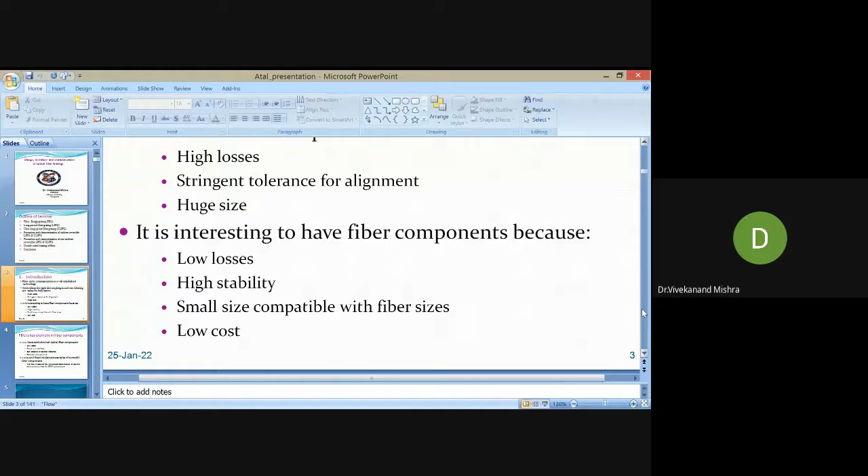It's very difficult to control the light pulses. If you want to do routing, if you want to change the path of a particular signal, how do you do that? So many bulk components are there, bulk optics, but there are higher losses. We need a device with minimum loss, small in size, low in cost, which can let us play with the optical signal, making it much easier in the optical communication system.

One device which is very useful is known as the fiber Bragg grating, a component which has the ability to control the light, to route the light signal, to reflect, to refract, to do spectral shaping of the propagating light signal, and can also work as a sensor. So many things we can do with just one tiny, inexpensive component, known as the fiber Bragg grating.

Fiber Bragg grating is one of the components that brought a revolution in optical fiber communication due to the lower loss in the fiber. It's easier to be compatible with the fiber, with easy shaping of the spectral response. For all these reasons, the fiber Bragg grating is very useful nowadays in optical communication systems for controlling the light directly.

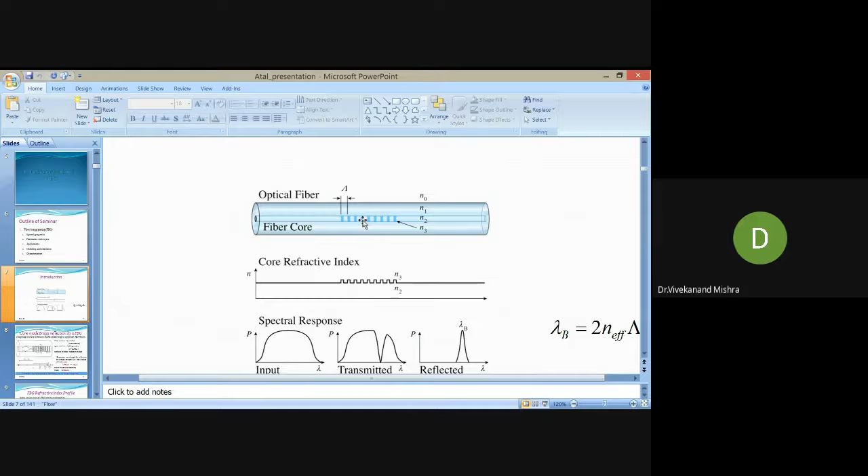But here, light which is coming in the core encounters a change of refractive index again, so the light is going to be interrupted. Depending on which way you want to interrupt the light—whether you want to transmit it or reflect it—we can design this grating period. The grating period plays an important role; based on how strong this grating period is, it determines how the property of light is going to change.

In this case, there's a core refractive index. You can see the variation of the core refractive index: N2 is the refractive index of the core, and N3 is the refractive index of the variation written as a grating.

When the input spectral response is inserted inside the optical fiber, a fraction of light is reflected. You can see here, a fraction of light which has been reflected, lambda b — this is known as the Bragg reflectance, lambda b. This lambda b equals 2 n effective period, meaning the reflected light from the grating totally depends upon the refractive index difference between the core and the period, and the length of the period.

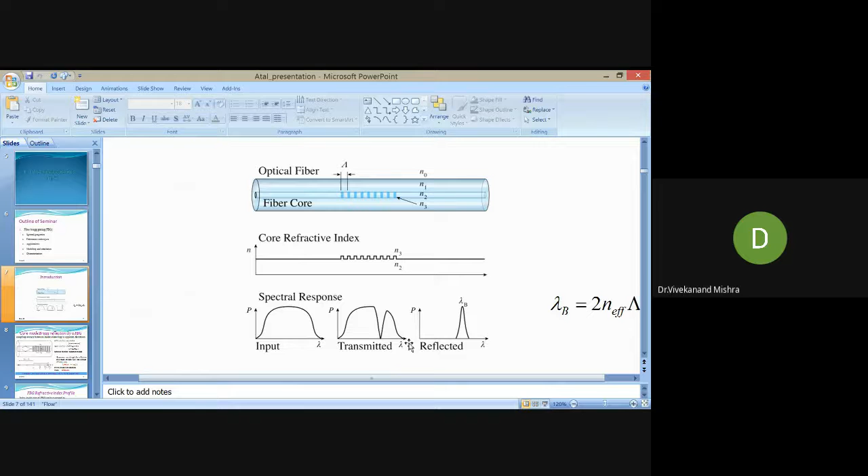And n effective is responsible for the reflection of this fraction of light, which is known as lambda b, or we can say Bragg reflection. So this is one of the very good applications of the fiber grating. Specific wavelength we can reflect according to the requirement. We can design the grating according to our requirement, and we can reflect the light signal. So this is one of the fundamental fiber grating working principles.

In the fiber grating, the main modes which are going to be coupled are the fundamental modes, the modes which only propagate in the core region. You can see here, the light signal is coming and gets reflected, and after reflection they are coupling to each other, and this coupling will let you know what is the spectral response of the light. So here the same modes are there, only the modes which are propagating in the core region.

So that's why here the n effective is going to be combined together, and we can say the Bragg reflection is equal to n effective 1 plus n effective 2 into period. Bragg reflection comes to n effective period, because both modes here are identical. So Bragg reflection will be 2n effective multiplied by the period between the two gratings. This is the period between two, and this is the first order; it is not going to be the second order mode of diffraction, only first order.

Then it's going to be coupled together, and after coupling, how much strong coupling there is of the modes will let you know the spectral response of the output.

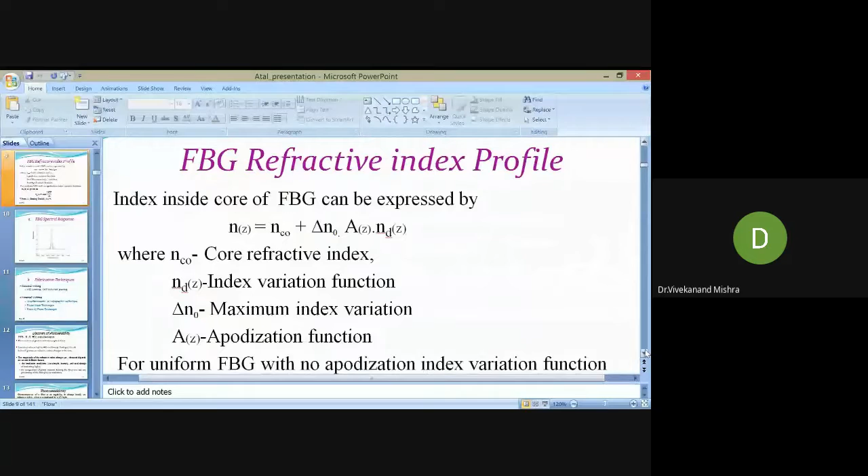Refractive index profile variation inside the fiber grating we can define with this formula, where you can see the core refractive index variation function and the apodization function are the components which will let you know the spectral response of the grating.

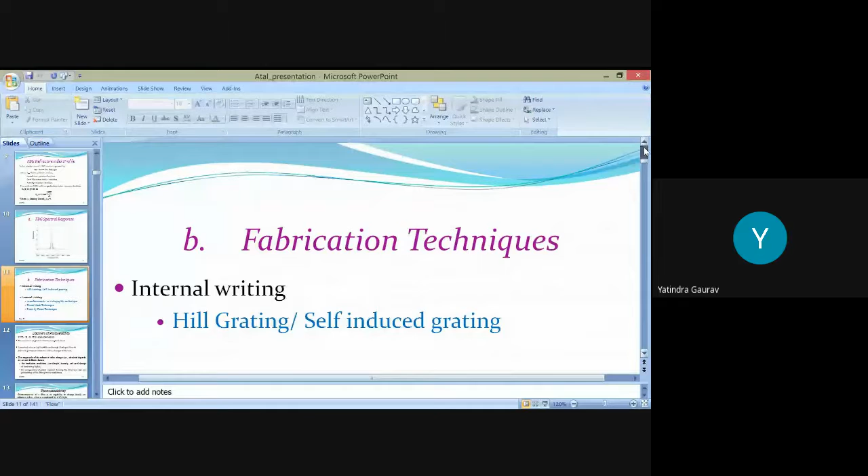Now we'll see how to fabricate that fiber grating. There are several ways to fabricate it. Internally we can write, or externally we can write the grating.

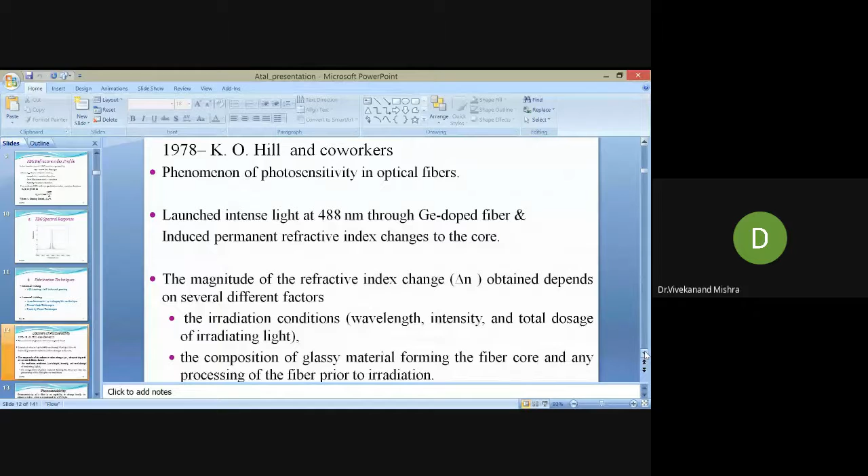So for internal writing, we need to understand the property of photosensitivity, because optical fiber is made from silica atoms, and we dope germanium inside. We can dope germanium inside and make some impurity, some changes, and we can change that refractive index just by doping multiple semiconductor materials inside, and based on that we can modulate the refractive index. So if you want to change or write internally, we need to use the photosensitivity method.

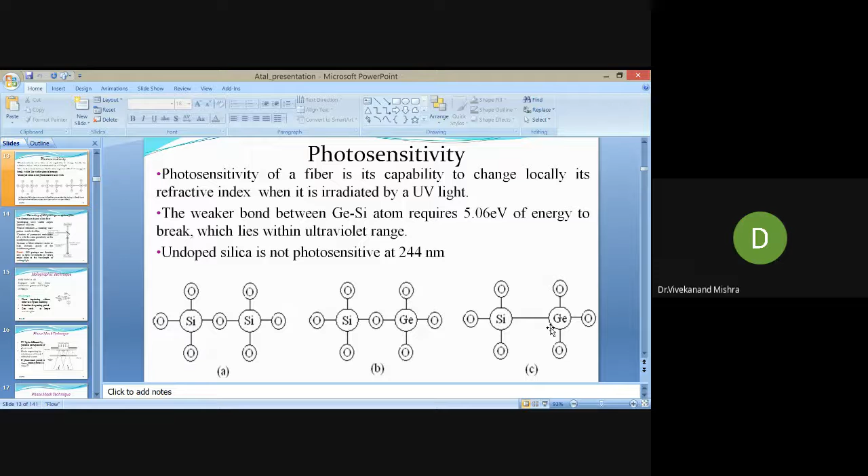You can see here, this is the optical fiber chemical composition. Here silicon dioxide, germanium doped inside as a defect, and that germanium-silica bonding we can break just by applying 5.06 electron volt energy. And you know, breaking of the bonding means changing of the refractive index, and if continuous in the fiber, if you apply 5.06 electron volt energy, there is a continuous change of the refractive index that will take place inside the optical fiber.

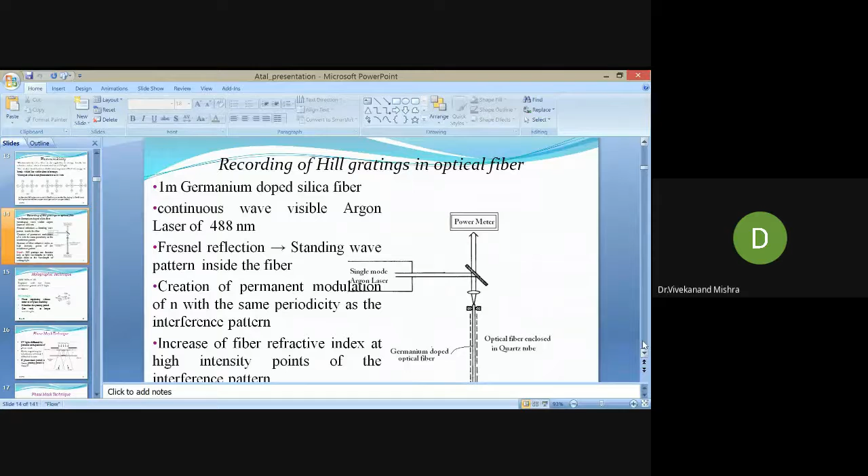You can see here in this figure, this is the Hill grating in optical fiber, how the single mode argon laser is here, and this is the lens. When the light signal is coming inside the optical fiber, a standing wave will form inside, and that standing wave creates permanent modulation of refractive index inside the fiber. And that's why this is the way to get the change of refractive index internally inside the fiber. So this is the internal method.

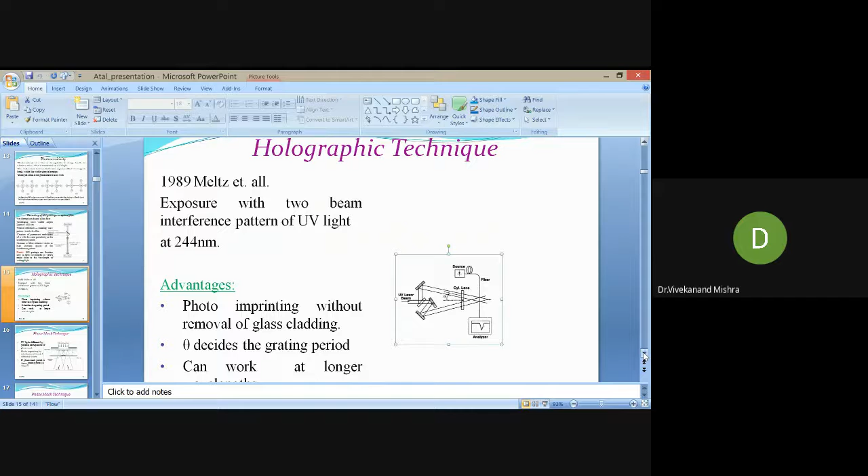So theta will increase or decrease the periods in between the fiber. This is one of the ways to fabricate the grating in the fiber, where we can see in OSA, in optical spectrum analyzers, we can watch at the same time what changes will occur and what the grating length is, and according to that we can increase or decrease the theta value, and make the grating inside the fiber. So this is one of the ways to fabricate the grating inside the fiber.

One technique which is very important is the phase mask technique, where corrugated periods have been used, and when the ultraviolet light signal is incident, interference will take place between the two.

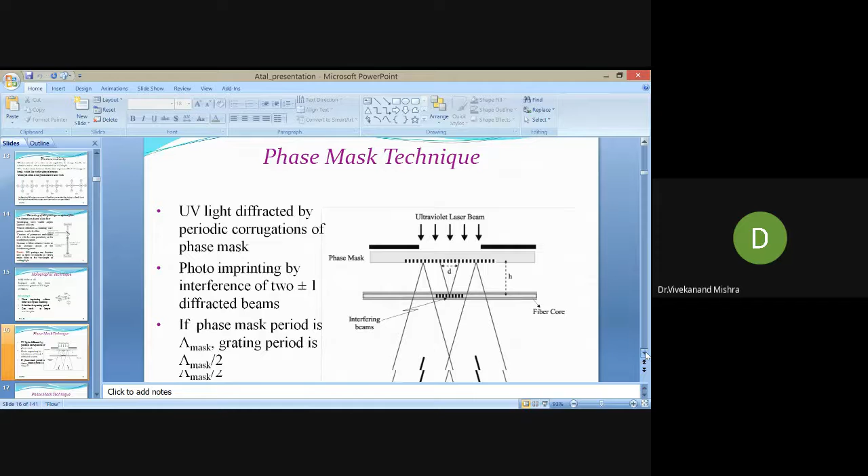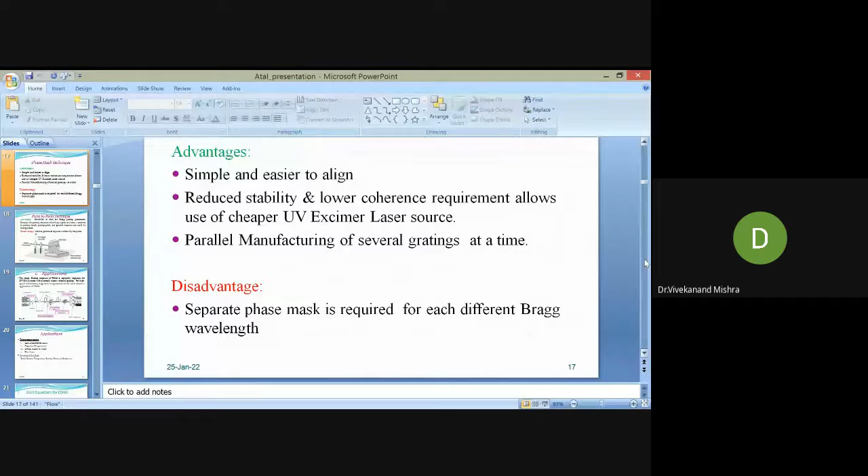You can see the interference technique. By this interference technique, this is the corrugated grating, and the light signal is incident from here, and photo imprinting takes place in the fiber. The plus one and minus one diffraction patterns, first order, will decide the length of the periods that will be written inside the fiber. So this is one method very useful for fabricating the periods inside the fiber. This method is very useful because it's easy to align and it's less costly.

Now we'll see the applications of the fiber Bragg grating. There are many applications, not only in optical communication systems, but in other applications like medical systems, hospitals, and more. Optical fiber grating is very useful. First we'll see the use of fiber Bragg grating in the optical communication system.

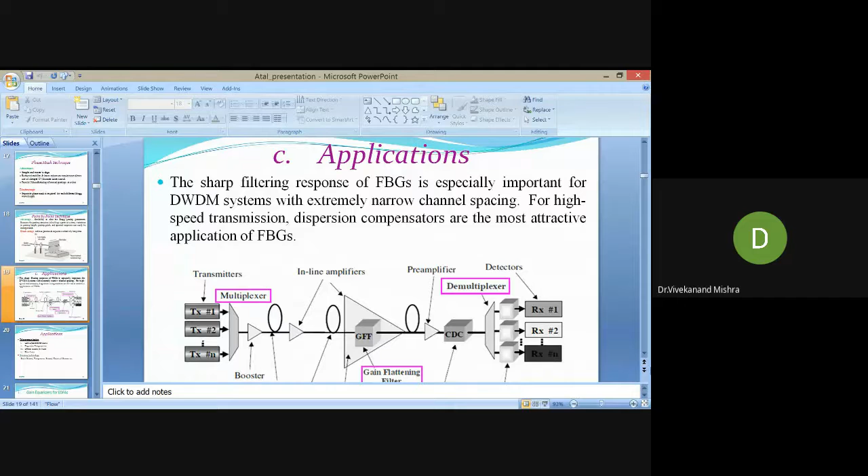You can see this system showing WDM technology. Multiple transmitters are here, and this is the multiplexer. So multiple low bandwidth signals are combined together and accommodated in a single fiber. There is very narrow spacing of the channels, and this is the booster which will amplify the signal. This is the inline fiber, the optical fiber.

So GFF is the gain flattening filter which combines all the gain flattening together, and then that flattened gain can be used for amplification purposes or for signal enhancement, maintaining all the information together. This gain flattening filter is made from fiber Bragg grating. The fiber Bragg grating concept will be much clearer when I explain some other applications of the grating.

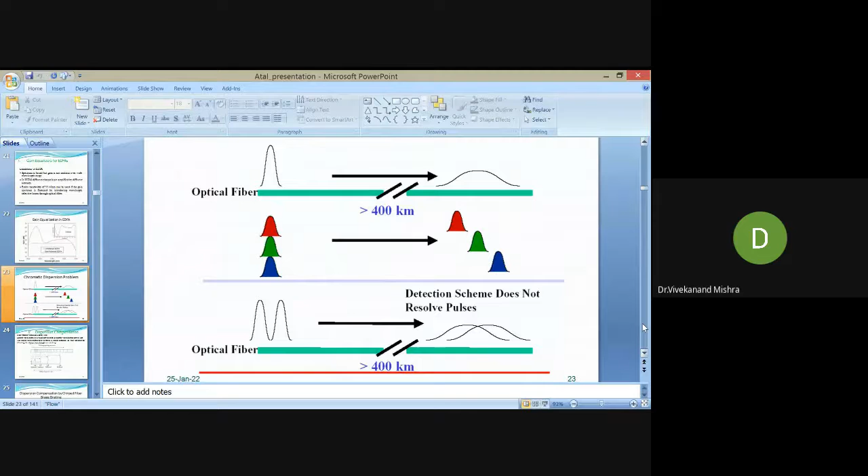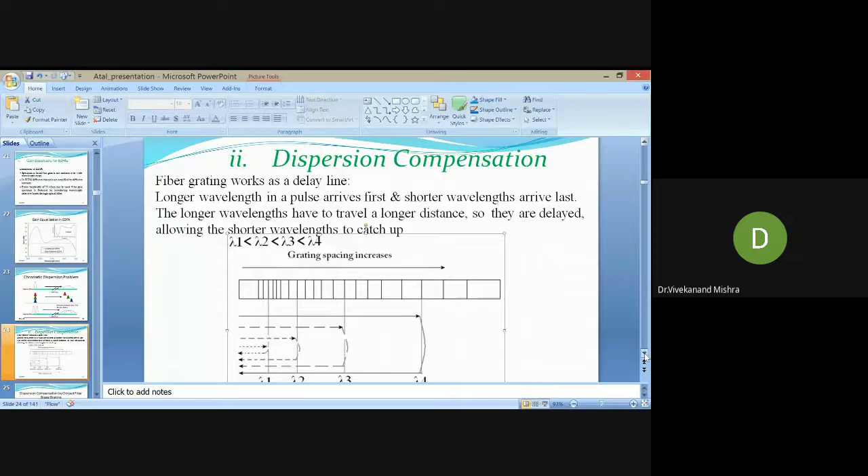Now multiple signals are coming into the grating, and suppose the longer wavelength has to travel a longer distance, and the shorter wavelength will travel a shorter distance. See here, lambda 4 is the longer wavelength and lambda 1 is the smallest wavelength. So the longer wavelength has to travel a longer distance, and the shorter wavelength lambda 1 has to travel a shorter distance.

So what will happen? The longer wavelength will be delayed, allowing it to reach the output with the shorter wavelength. Now the shorter wavelength and longer wavelength will both reach the output at the same time, just by slightly changing the grating spacing. We can design it according to the requirement, which is how to make all the pulses reach the output at the same time. This is the way to send all the wavelengths to the output at the same time.

By making such type of grating, multiple signals can be accommodated, and according to longer and smaller wavelength, they will travel longer and smaller distances. There is a delay for the longer wavelength, and due to that delay, the longer wavelength will also reach the output along with the shorter wavelength. This is the way to minimize pulse delay by using the fiber Bragg grating. Such a fiber is known as chirp fiber Bragg grating, where the grating period increases. If signals come inside such a grating, it will maintain the shape as in the beginning.

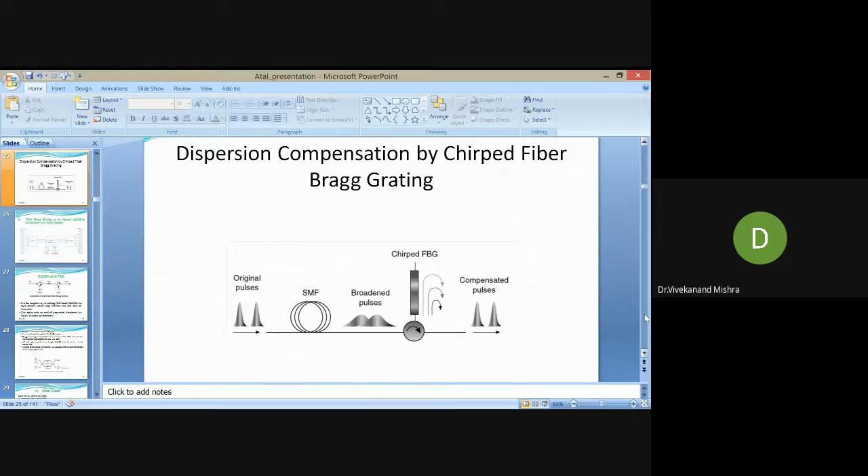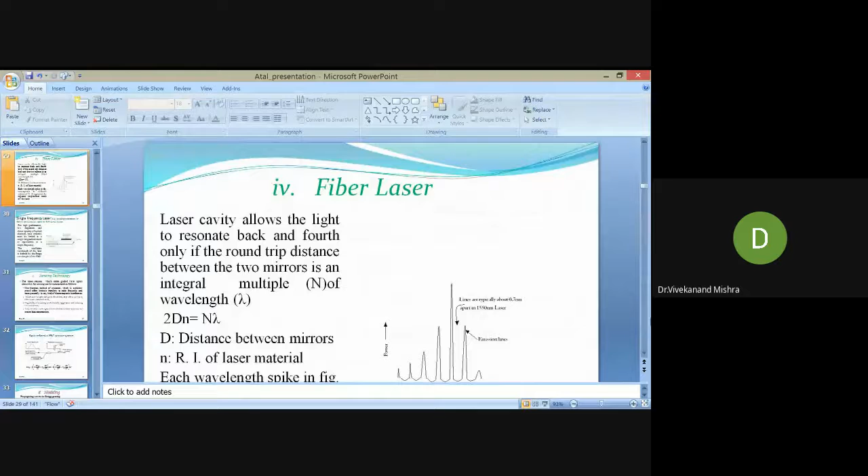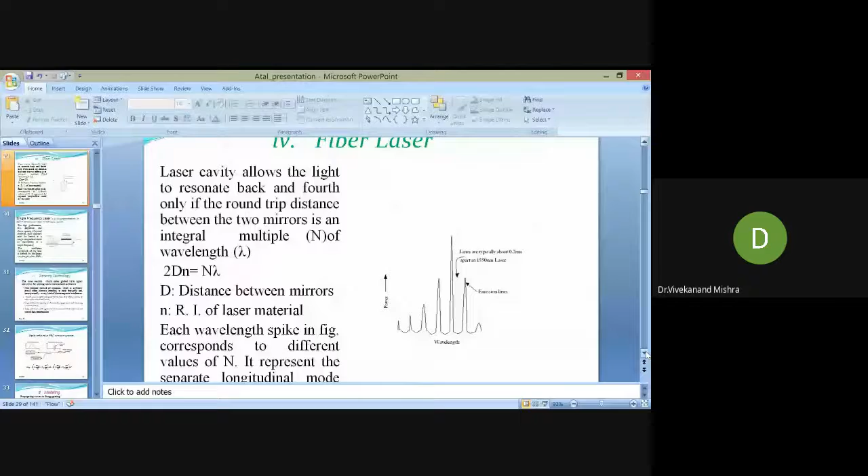We know that in optical fiber communication, optical cavity plays a very important role in the laser. In the laser, optical cavity plays a very important role. In fact, the optical cavity is the one which makes the light signal coherent.

It depends only on the wavelength and the length of the cavity. If the length of the cavity and the wavelength are compatible, then the light signal which enters inside the cavity will maintain coherency. And if it is coherent, then it will be like a laser, because the main principle of a laser is the coherent light source, and that coherency is made by the cavity.

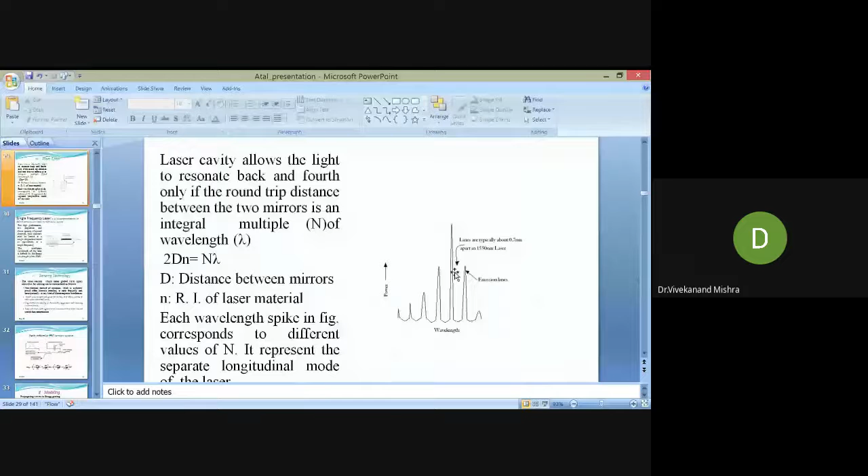Why do we choose 1550? Because it is one of the very useful bands where minimum loss will be there, and also EDFA will support the 1550 nanometer. That's why I choose 1550 nanometer. So if single frequency is there, more bandwidth will be there, and more bandwidth means more message carrying capacity. So this is the way to make a single frequency laser just by using the fiber Bragg grating.

One of the very good example applications of the fiber Bragg grating is sensing technology. See, we have multiple sensors in mechanical engineering and electronics engineering, at very low cost. We can sense temperature, pressure, strain, stress, all we can sense.

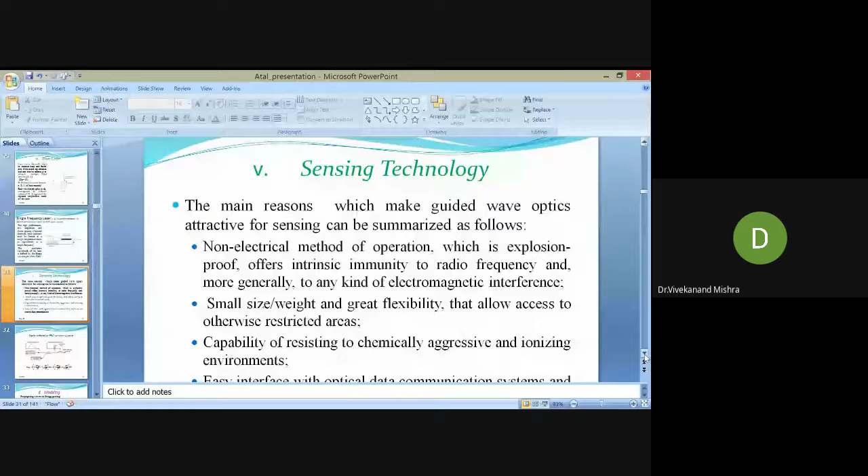Nowadays we can see multiple sensor components that get damaged due to short circuit. But if you use a sensor made from optical fiber technology, this problem will not take place. So this is the reason why optics related materials are very useful in sensing technology, because of explosion proof, no cross connect, no short circuit. So sensing technology is one of the very good fields for optical fiber communication, where we can use multiple components as a sensor.

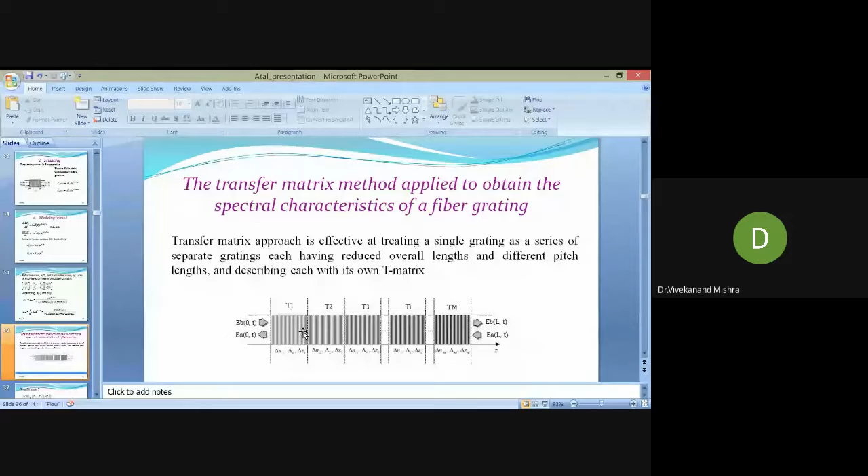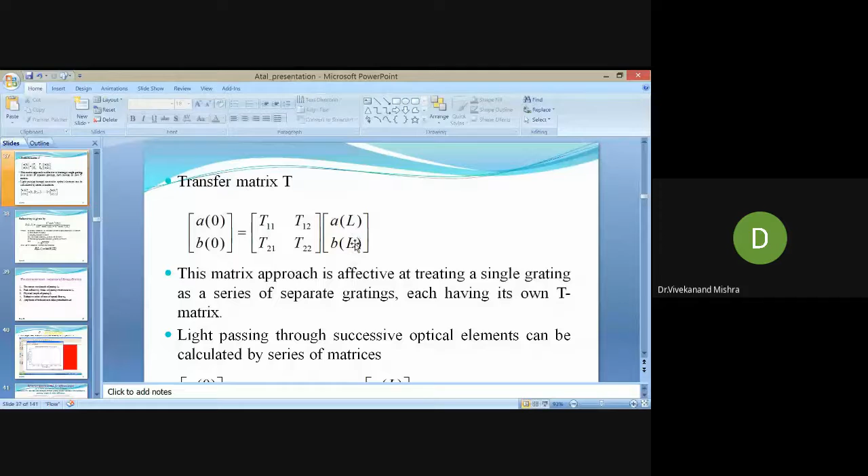Also, we can use the transfer matrix method. Transfer matrix for each and every period, T1, T2, T3 - these are the periods of any grating. For each and every period, we can use the transfer matrix method, and we can design just by using matrix formula, and by putting the boundary condition we can get how much is the reflectivity.

So this equation is for the single period, and this shows, suppose multiple optical elements or multiple series of periods are there, then you can use this formula, and we can proceed further solving this matrix to finally get the reflectivity of the fiber Bragg grating. Here you can see the reflectivity of the fiber, the grating length and wavelength totally depend upon the coupling of the signal inside.

Okay, so these are the properties of the fiber Bragg grating, and these are some results of the simulation which we have received for the fiber Bragg grating. For an index difference of 0.008, maximum reflectivity at 1550 nanometer comes around 93.7%. This is the reflectivity of the fiber Bragg grating.

If you put the length of the grating as 1 millimeter, also we can see here the reflectivity is not 100% because there are some side lobes, and we need to remove these side lobes to minimize the loss.

And if you remove these side lobes just by apodizing the grating, just by changing the geometry of the grating, we can minimize the side lobes. And if we minimize the side lobes, we can get sharper reflectivity. This phenomena of minimizing the side lobes of the output of fiber Bragg grating is known as apodization.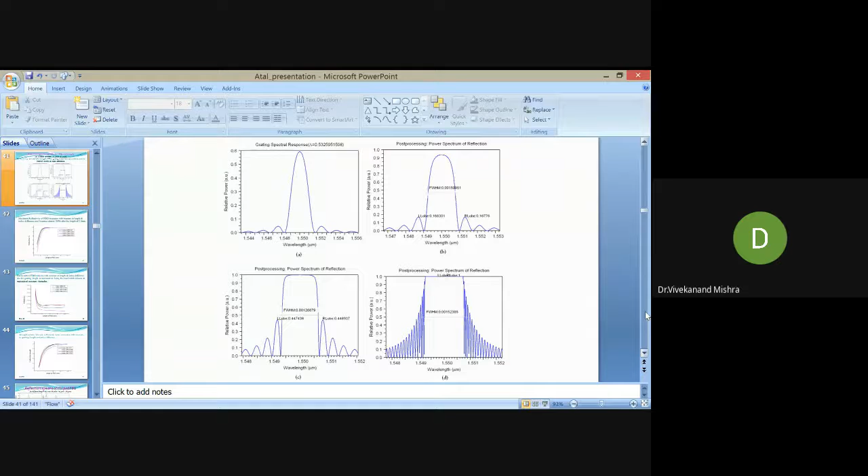Here you can see the wavelength at 1550 nanometer, here also the same, but the FWHM is increasing. First thing. Second thing, also you can see that side lobes are increasing very fast. That's why the intensity of the maximum reflectance is not so sharp. So that side lobes we can minimize just by designing the geometry of the period inside the fiber Bragg grating.

This is the maximum reflectivity for the fiber Bragg grating, which will increase with increase of the length. You can see when the index difference is 0.01, 0.003, then how the reflectivity percentage is increasing in the fiber Bragg grating.

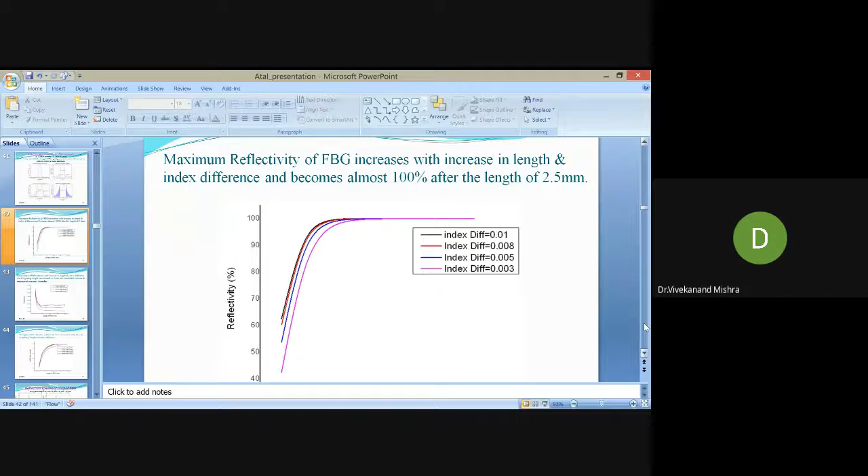Here you can see the bandwidth. All the things we were talking about the bandwidth - we of course every time are looking for larger bandwidth. So larger bandwidth depends upon the FWHM. You can see how the bandwidth reduces with increase of the length. See, length is increasing, so FWHM is decreasing. This is indication of the decreasing of the bandwidth.

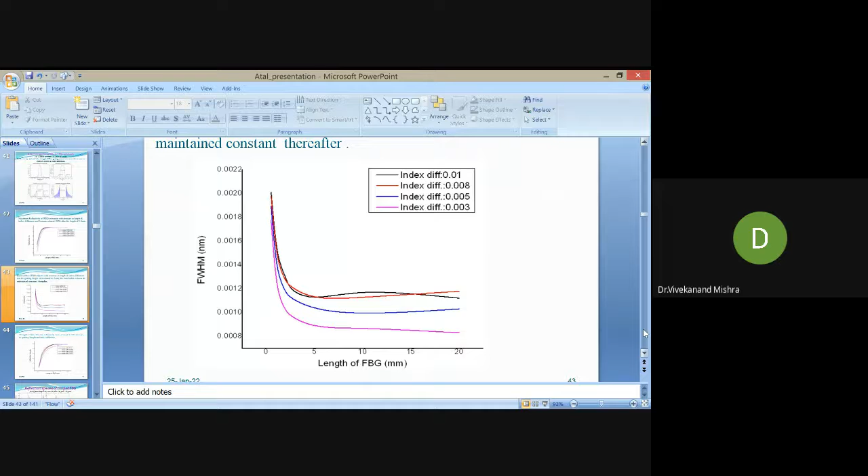So length of the grating, the refractive index difference, and effective index all play an important role if you want to design a perfect fiber Bragg grating for bandwidth. Then you have to keep all these things in mind for higher bandwidth. As I told you, the side lobes play an important role - the strength side lobes of the reflective curves increase with increase of the grating length.

Also, if you make a grating whose periods are increasing or decreasing in shape - you can see here in this figure, the periods, the distance is decreasing here, from beginning to end decreasing or increasing - if you make a grating like that, it's known as chirp fiber Bragg grating. So for the chirp fiber Bragg grating, the output for different lengths is like that.

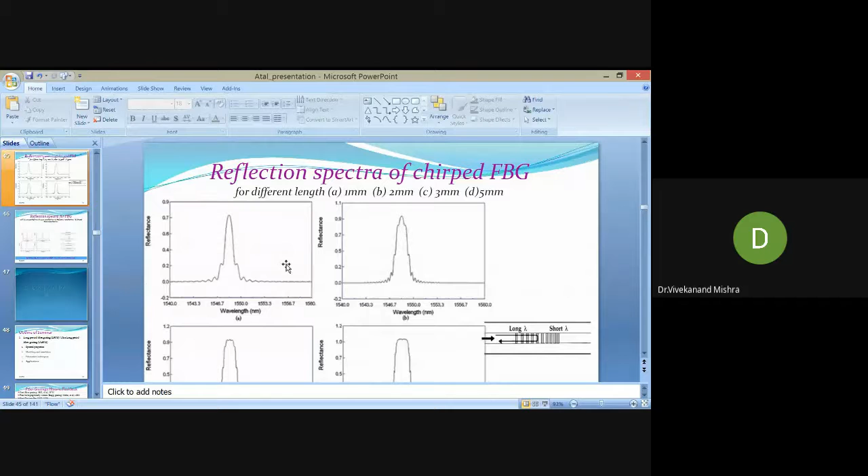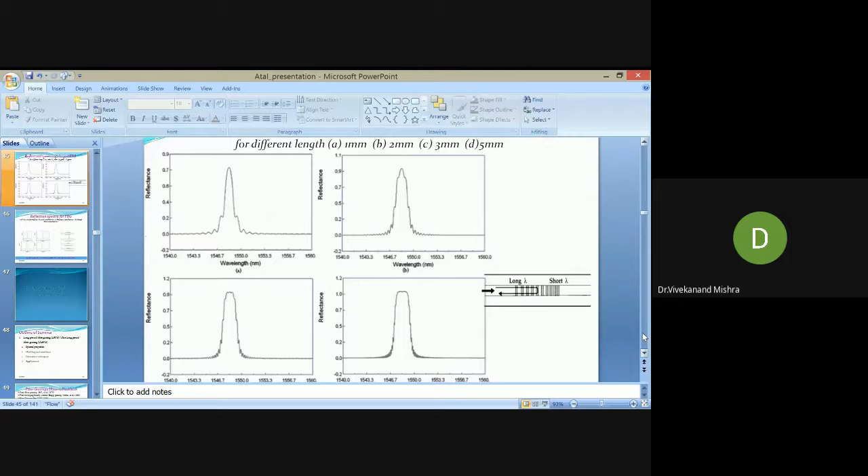See, for 1 millimeter, 2 millimeter, 3 millimeter - if the length of the grating is increasing, for 1 millimeter this is the output of the reflectance of the fiber Bragg grating, for 2 millimeter, 3 and 5 millimeter. So as length increases, there is also an effect of the side lobes increasing. That's why the sharpness of the FWHM, the sharpness of the reflectivity, is going to decrease. So length of the grating plays an important role.

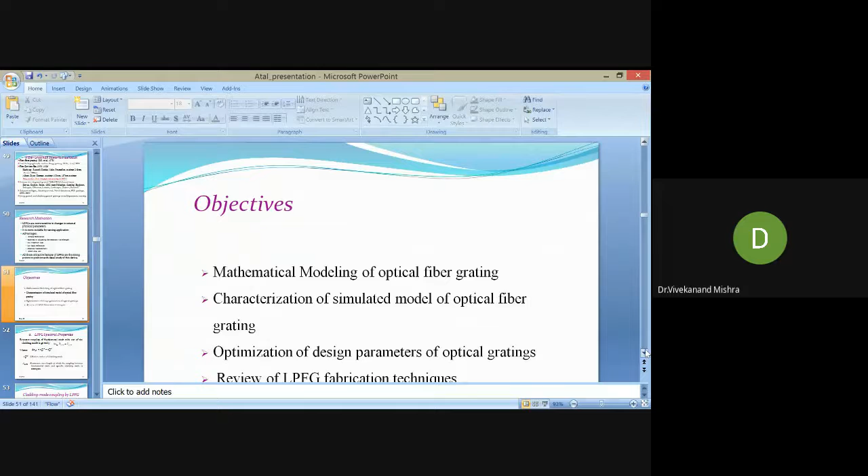It's very easy to fabricate a long period grating because the periods are not very small. The period size is in terms of millimeters, not micrometers. We did some modeling and simulation for the long period grating, and we'll show you all these results.

But before going to the results of the fiber long period grating, let's see some mathematical properties of the long period grating. The resonant coupling in the long period grating totally depends upon the N effective, which in turn depends upon the refractive index of core and cladding, because in the previous case only the core was involved, but here it's core and cladding.

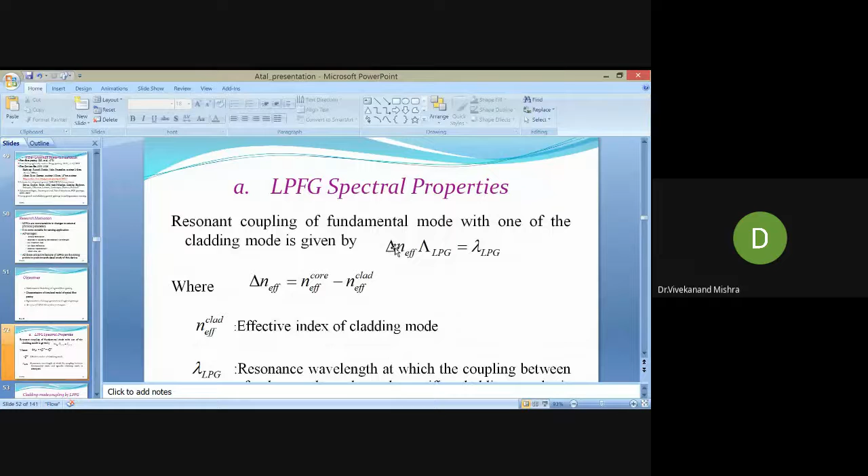In long period grating, the light signal is not coupled with core modes only; it's also coupled with clad modes. That's why the clad refractive index plays an important role in getting the Bragg reflectance. This lambda LPG is the Bragg reflectance of the long period grating, this is the period of the long period grating, and this N effective is the difference of core and cladding refractive index. So these parameters play an important role for the Bragg reflectance or transmittance.

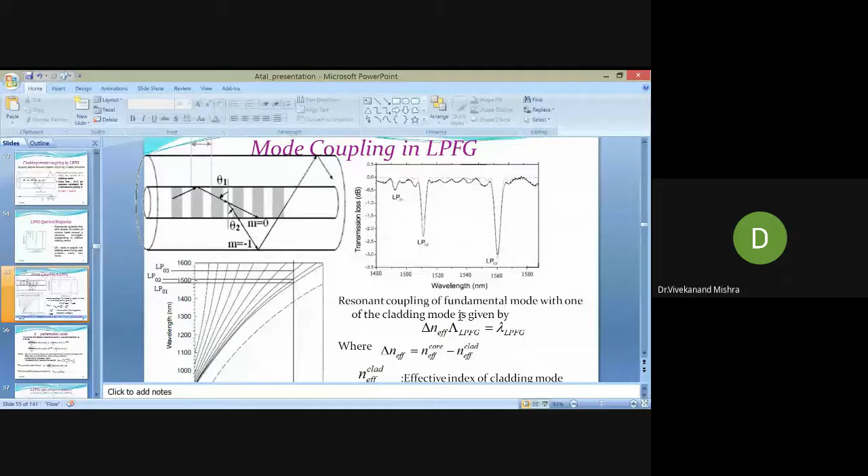You can see this is for the fundamental mode, LP01, linear polarized fundamental. The losses of the different modes will be different at different wavelengths, and that we can calculate just by using the resonant coupling fundamental mode formula, and effective period LPFG is equal to lambda LPFG. This is the Bragg reflectance, transmittance, and this depends upon the change of the refractive index of the core and cladding region.

Also in this figure you can see, if the grating period is very less, around 150, how the fundamental modes LP01, LP02 and LP03 have transmission losses. You can see the transmission loss: if you increase the grating period, the fundamental mode loss becomes larger by increasing the grating period. So grating period plays an important role.

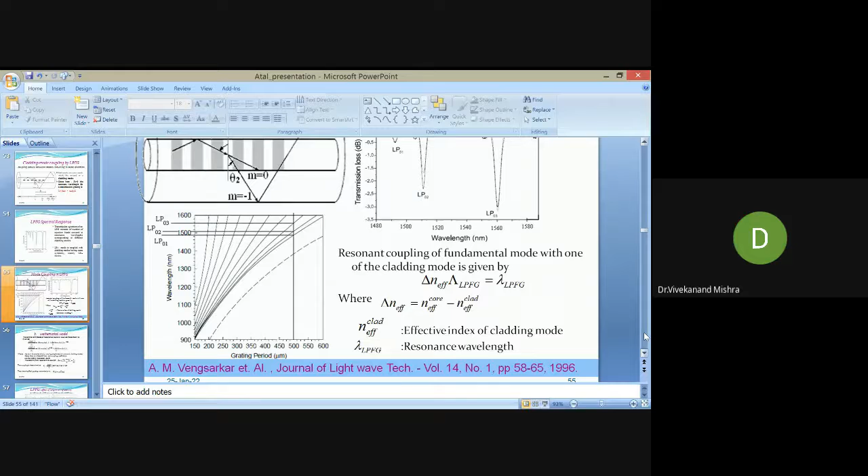So here also there is a mathematical modeling we have done for the long period grating with core and clad modes. Just by applying the coupled mode theory, we made this equation, and using the coupled mode theory, this is the simulation result for the long period grating.

So when you can see the transmittance for different lengths, increasing the length, you can see the transmittance is going to be sharper.

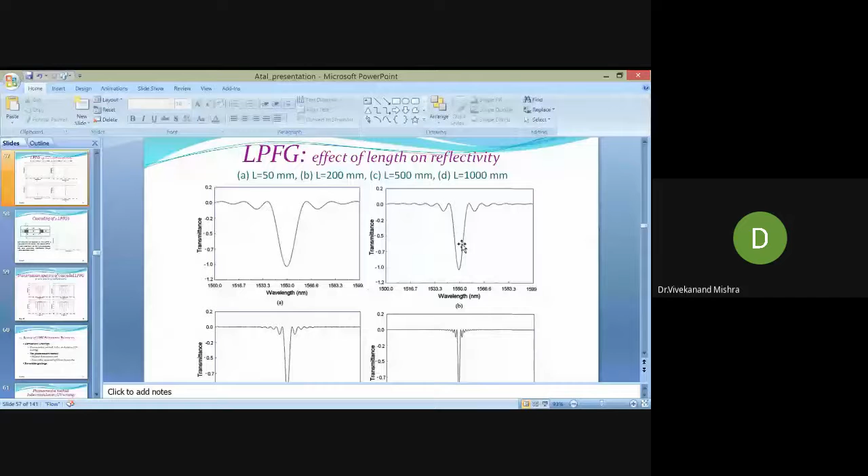See, now L is 1000 millimeter. How thinner, how sharper is the transmittance. So L plays a very important role in giving the transmittance of the signal.

Also, we have done some cascading of two LPGs. We combined two long period gratings, and did the mathematical modeling using the coupled mode theory, and we got the output like this. See, this is the two long period gratings combined together.

Okay, and the light signal is coming here. Then it's coupled with core and clad with the first LPG. See, it's going in the clad region, and then it's going again in the core region of the second LPG, and then coming out as output like that.

So light coupled into cladding by the first LPG is recoupled. See, here it's recoupled, all light is going to be recoupled here, with light propagating in the core, producing interference fringes, and that interference fringes will be something like that in terms of the transmittance you can see here. So this is one of the experiments which we did for the first time, cascading two LPGs.

Transmission spectra for the two LPGs combined together, 5 LPG, 10 LPG, 20 LPG, you can see the transmission spectra, how it becomes very sharpened.

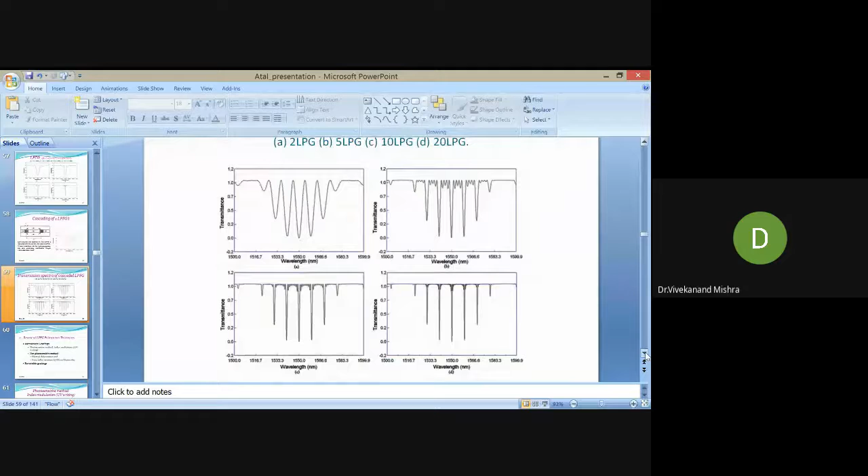Very easy, what we discussed previously, just by using UV writing, one of the methods for writing the LPG. It's very easy, you can do it in your lab also. You can just, by simple means, purchase the UV writing source, and purchase a fiber Bragg grating, and you can design, you can write it. But you're supposed to have a laser, you're supposed to have the OSA, and by using UV writing, you can make your own grating inside your lab.

So this is one way of making the permanent grating. If you're writing the grating by UV, then it will be permanent. We can also make a reversible grating. There are many methods to make both reversible and permanent gratings, but I will not go too deep into that. I will just show you some of the methods.

This is the phase mask technique. As you know, when the light signal comes through the phase mask, it gets interfered in the fiber core, and that interference changes the refractive index. So this is one of the ways.

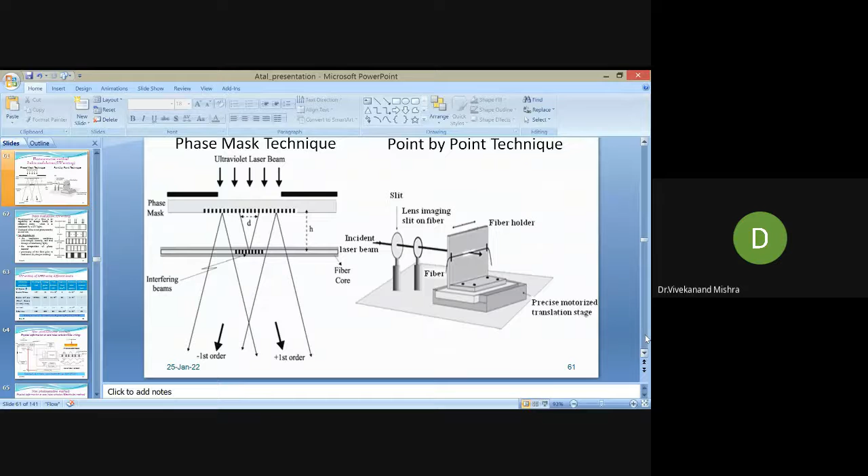This is similar to the UV writing, point by point writing in the fiber, already discussed. It's the same method here, because you are increasing the length of the period, and you can increase that length just by increasing the distance.

Another thing to be aware of is the photosensitivity of the fiber. The fiber is made from silicon dioxide, silica materials, and by using the light signal we can disperse the atoms. By dispersing the atoms in the fiber, the refractive index changes. Somewhere there are more dense silica atoms, somewhere less, so there is a change of refractive index in the fiber, and this happens through the photosensitivity phenomenon at 244 nanometers.

If you do the photosensitivity phenomenon at 244 nanometer UV light irradiation, we can change the refractive index of the fiber. But changing the refractive index alone is not sufficient — it must be a periodic variation of the refractive index, and then it becomes a long period grating. So precise distance movement is required for that.

Here is a comparative study of UV writing for LPFG using different lasers. The excimer laser has a wavelength of 157 nanometers, average power of 12 milliwatts, pulse duration of 15 into 10 to the power 6 femtoseconds, and exposure dose around 5 joules per centimeter square, giving a refractive index change of 5 into 10 to the power minus 4. So different lasers have different abilities to change the refractive index of the fiber optic core.

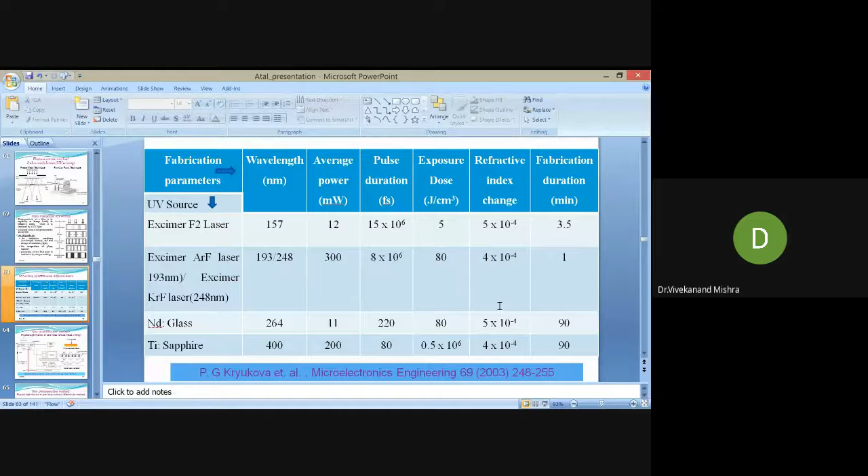Multiple methods and sources are there. There's also a non-photosensitive method using the carbon dioxide laser, where physical deformation takes place inside the core region.

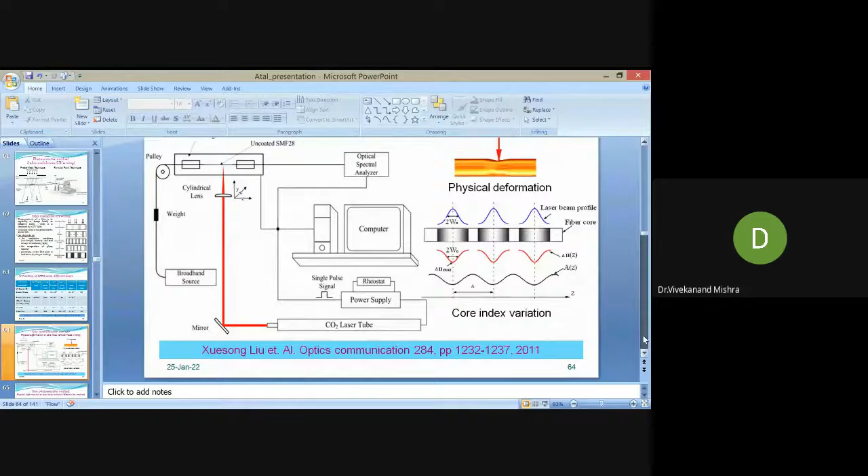This is a schematic figure using a carbon dioxide laser source. The fiber moves, and the carbon dioxide laser causes physical deformation inside the fiber, which we can analyze using the OSA. So these are the ways to make long period gratings.

Another very famous method is the electric arc method. The fiber is inside with a precise monitoring motor, and an electric pulse is generated, which is incident on the fiber core — this is called arc current, with specific parameters.

If the arc current is 8.5 to 10 milliamperes, the electrode gap is 0.9 to 1 millimeter, and the duration is 0.5 to 3 seconds, then the periods we can make range from 15 to 100. The arc is incident on the core of the fiber, and the motor moves it precisely; this electric arc current changes the refractive index of the fiber core. This is known as the electric arc method using the fusion splicer — with fusion splicer components, we can produce this type of long period grating.

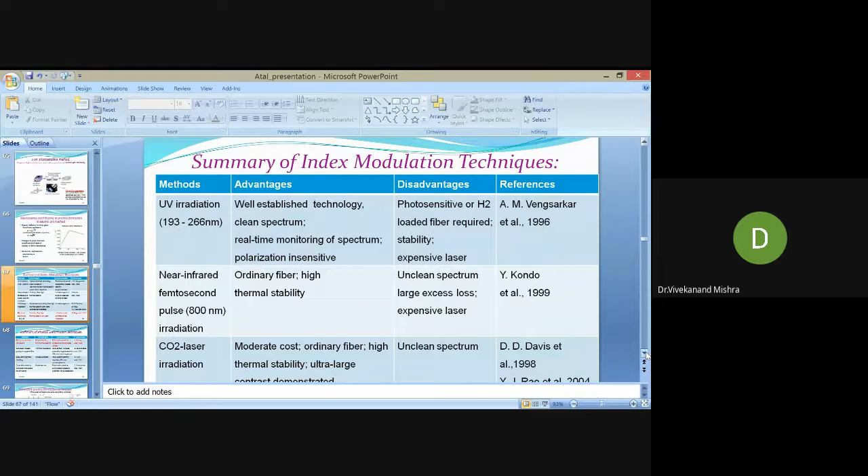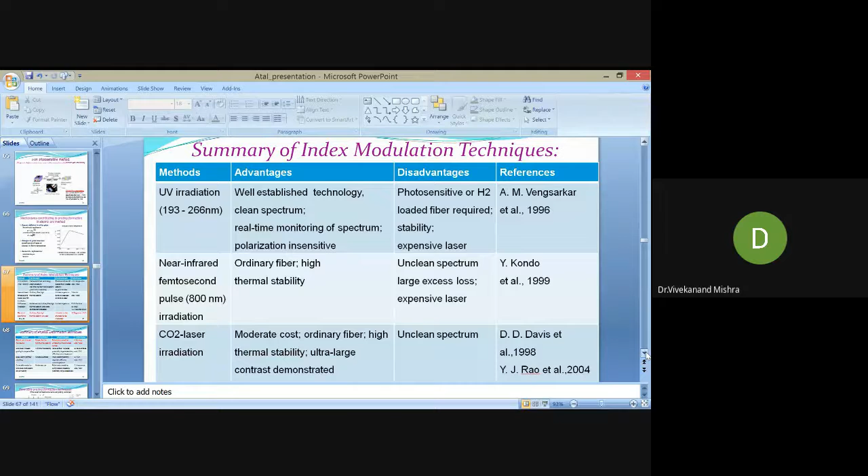Multiple methods exist for the modulation technique — UV irradiation, near infrared femtosecond, and others. Each method has its own advantages and disadvantages. This was first done by Vengsarkar and other scientists, with different sources offering different advantages and disadvantages. So this covers the different methods to fabricate the long period fiber grating.

This is one very good method — the reversible grating formation technique. Here, a groove plate is placed on the surface of the optical fiber, and pressure is applied from the top of the groove plate. Then a periodic formation, or periodic refractive index change, forms inside the fiber.

Also you can see here another way using a groove plate. This is the optical fiber, and these are the graphite rods, with pressure applied. You can see there is a deformation in terms of the refractive index in the fiber, and these are reversible. Once you remove the groove plate, it comes back to the previous condition. So this is the reversible grating.

Also you can see in this method, winding of wire around the fiber, tightly winding the wire on the surface of the fiber, will also change the refractive index of the fiber.

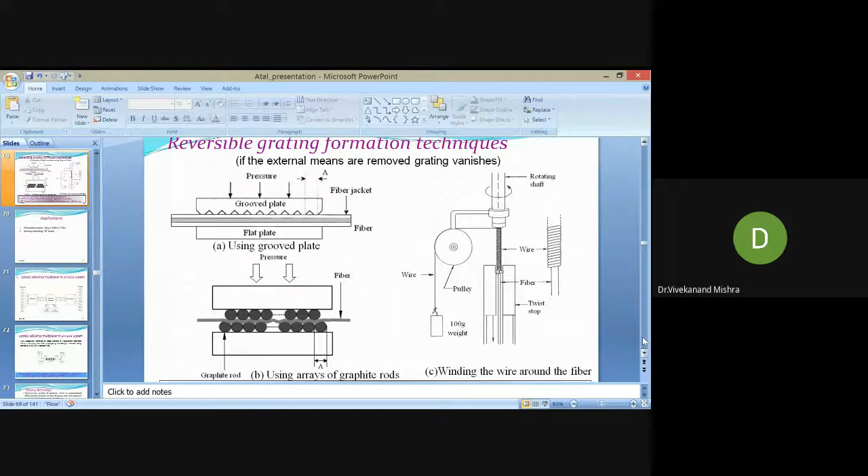These are reversible grating formation techniques, very useful for fabrication of long period grating, which has a lot of applications. We already discussed optical add-drop multiplexers. Just replace the multiplexer with a fiber grating, long period grating, and according to the design of the grating, we can add and drop the signal which is multiplexed together.

So what will happen? That wavelength may be reflected back, and the one which is not designed for will be transmitted further. So it depends on the grating size, grating period, which signal you want to add and which signal you want to drop out. This is one of the very good applications of long period grating in the DWDM system.

It's also very much useful for sensing technology. Long period grating is much more preferred compared to fiber Bragg grating, because here is the working principle of fiber Bragg grating. In FBG, all the mode coupling takes place inside the core only. But in a long period grating, the light signal is coming and going into the clad region.

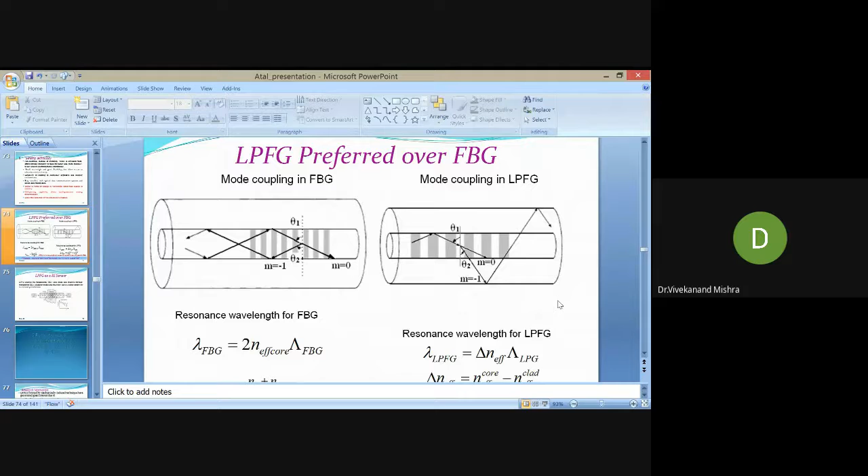So if any sensing substance is here, and light is coming from here, the sensing substance gets more attraction, more coupling with the cladding modes, and that's why the sensitivity here will be larger. Because the substance comes in contact with the cladding modes or evanescent field, a lot of interaction takes place between the light particles and the substance used for sensing purposes, and then it goes outside. We can see more accuracy and more sensitivity when using long period fiber grating for sensing purposes. This is one application of long period grating.

So it's very simple, very easy to fabricate. These are the ways that motivated us to go for such type of grating.

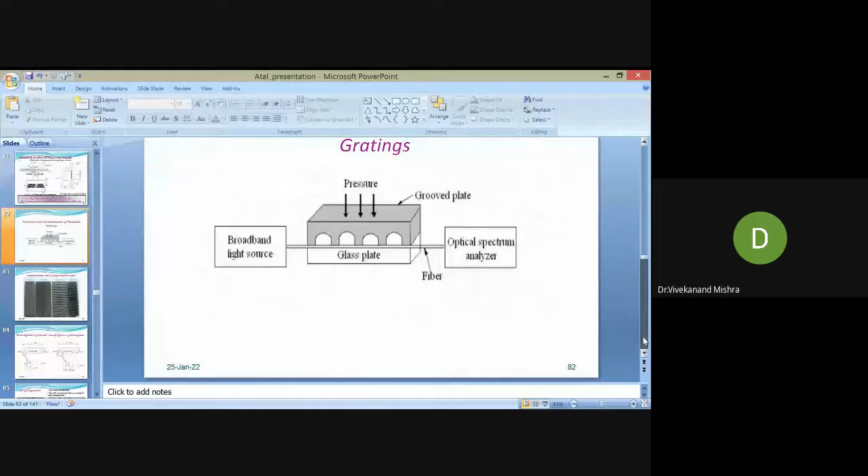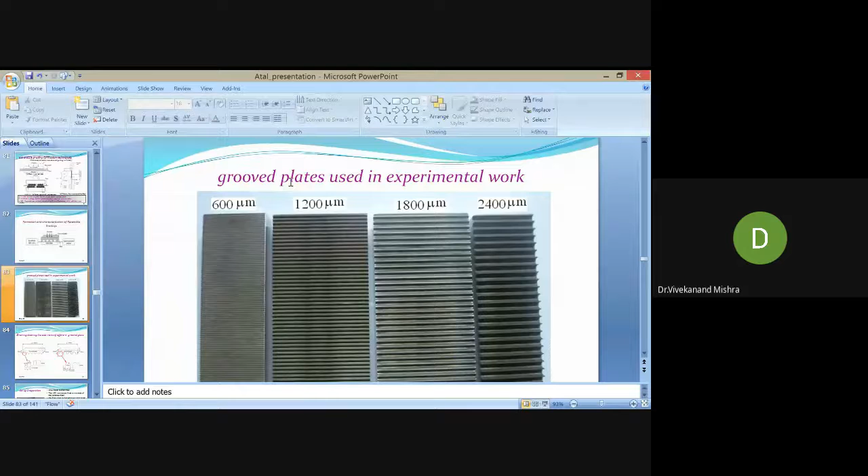So now we did an easy way to fabricate the long period grating. This first time we fabricate the groove plate with different sizes: 600 micrometer, 1200 micrometer, 1800 micrometer, and 2400 micrometer. First we make this type of groove plate, and place it on the surface of the fiber just by pressure, and we got a long period fiber Bragg grating.

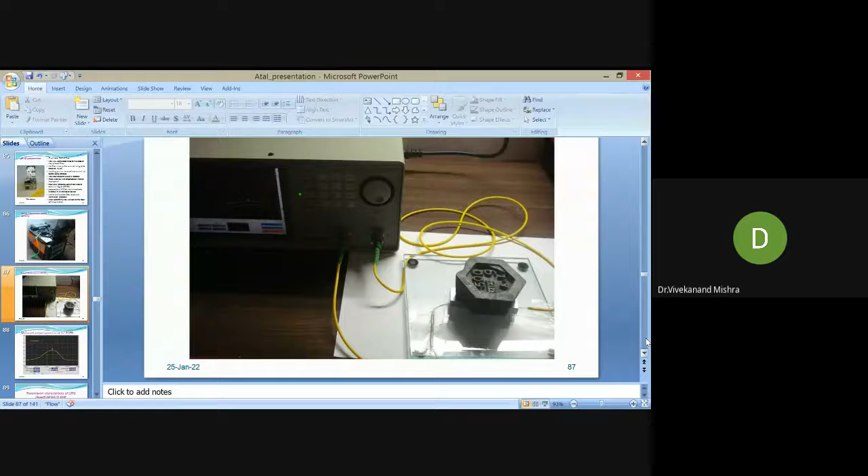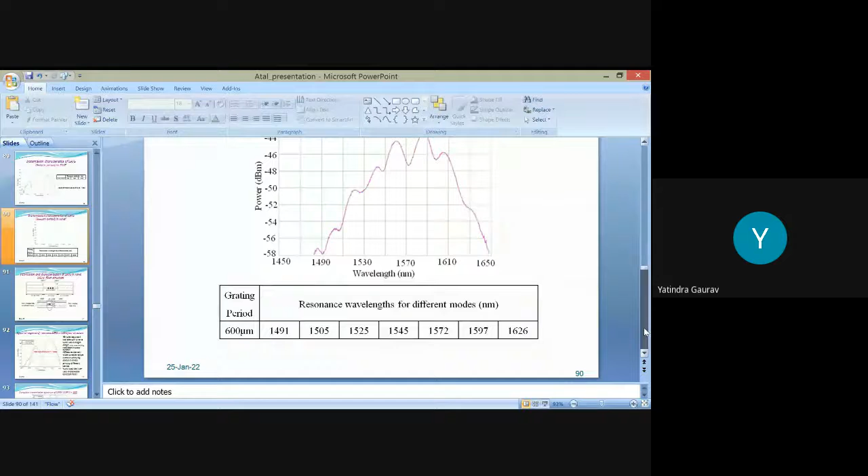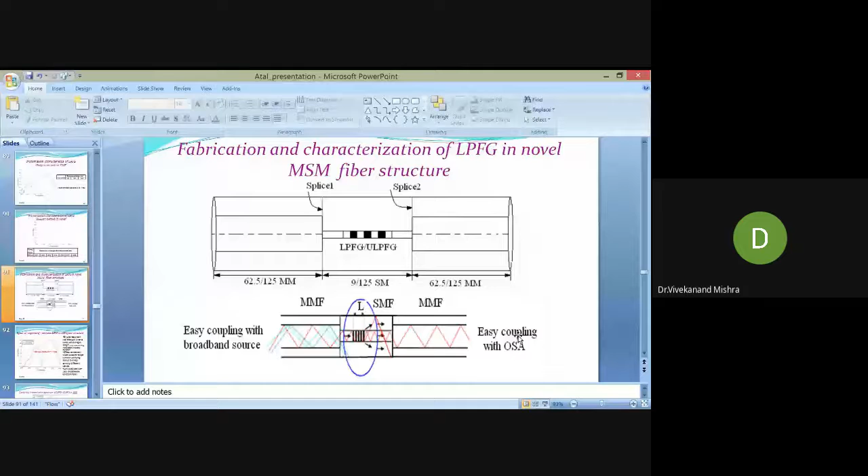So different configurations give different outputs. Here you can see the complete spectrum of long period grating and ultra long period grating in single mode fiber, showing how resonance peaks occur for different period sizes, 600 and 1800, combined in the same figure. You can see that for 1800 micrometer period, the resonance wavelength comes more at 1570 nanometers. But for 600, the resonance peak comes around 1610.

So this is the same thing here for the different periods. You are able to see different power. This is the transmission characteristics for the different periods.

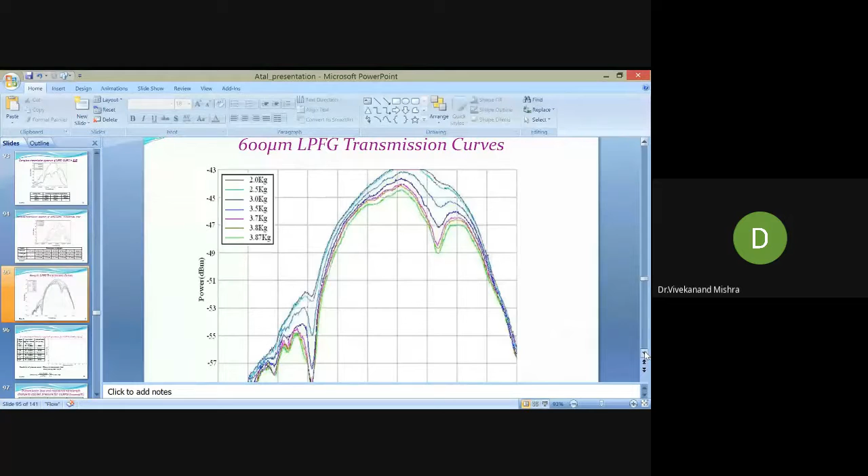Here we are using the long period grating at 600 micrometers, but with different weights. If the weight is changed from 3.87 kg to 2 kg by putting weight on the long period grating, different weights show different peaks. So how does the weight affect the transmission characteristics of the fiber? You can see here we get the same peak for all, but some peaks are very deep. If the weight increases, the peak becomes very deep, and if the weight decreases, the peak is much less. So this is the transmission spectrum of the light signal for the long period grating with different weight.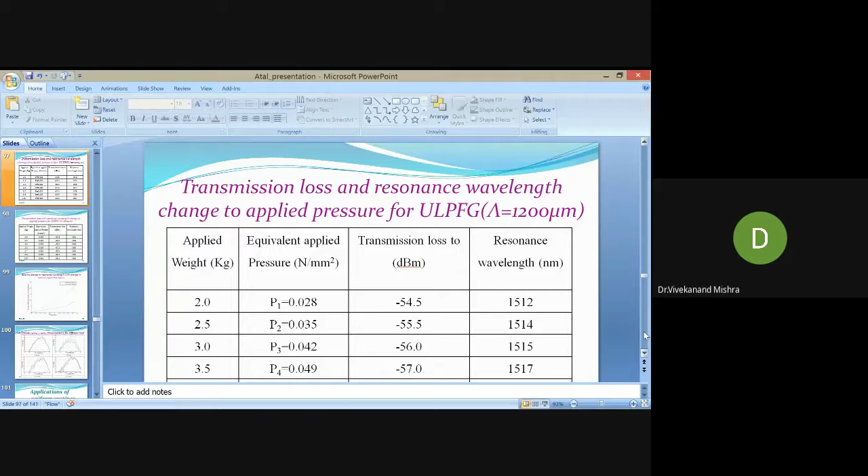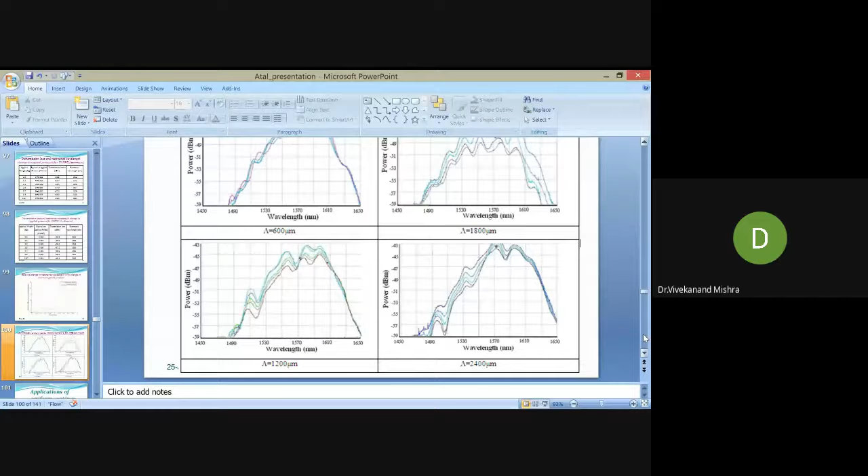So same results are here, just how weight will affect the transmission characteristics. Here the different periods, powers, different peak of the different resonant peak, different Bragg reflectance, we can say Bragg transmittance. Okay, so these are the properties.

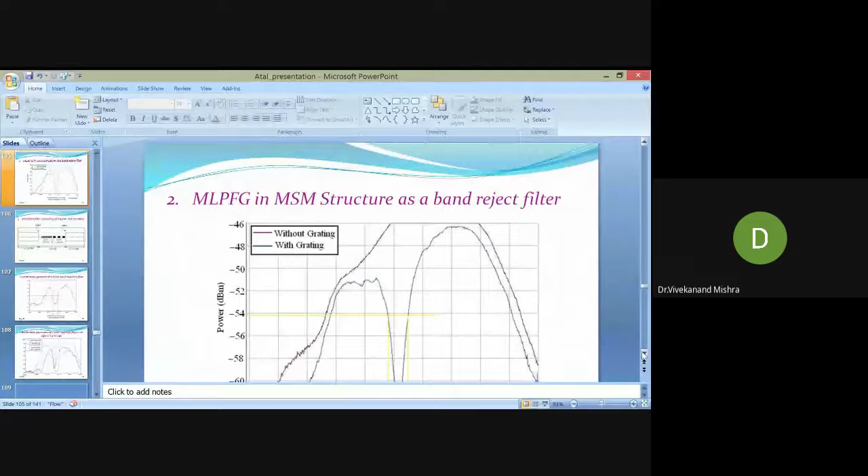Now we will see some applications of the long period grating. So the MSM, when we combine multi-mode fiber, single mode fiber, multi-mode fiber, this is the property of MSM long period fiber Bragg grating, which is useful not only to see transmittance and transmission loss, but also very useful for the band reject filter.

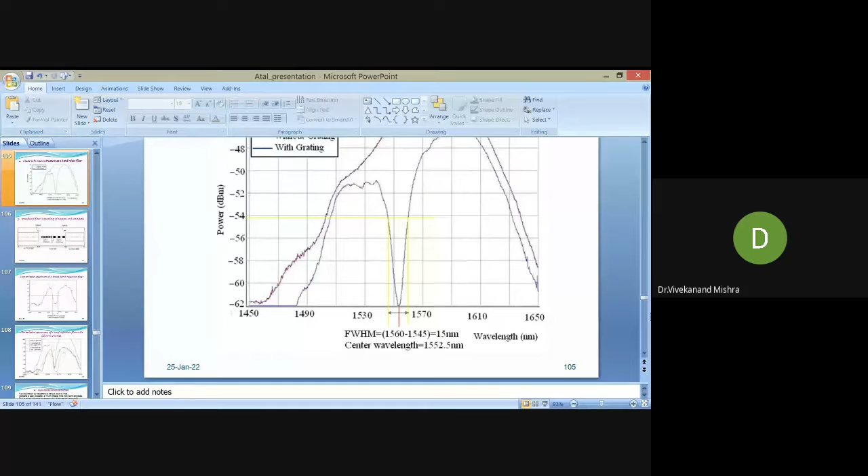See, this is another application of the long period grating. You can see this range, this is your full width half maximum, and it is around 15 nanometer. This yellow color you can see. With and without grating, you can see what power loss will take place. Also this range is going to be reflected back, or we can say this range is going to be filtered out. So this is another property of the long period grating, working as a filter.

One of the very good applications of the long period grating is fuel adulteration detection. Fuel adulteration by kerosene is one of the serious issues. It will increase the pollution, and it will decrease engine performance also. So how to detect that?

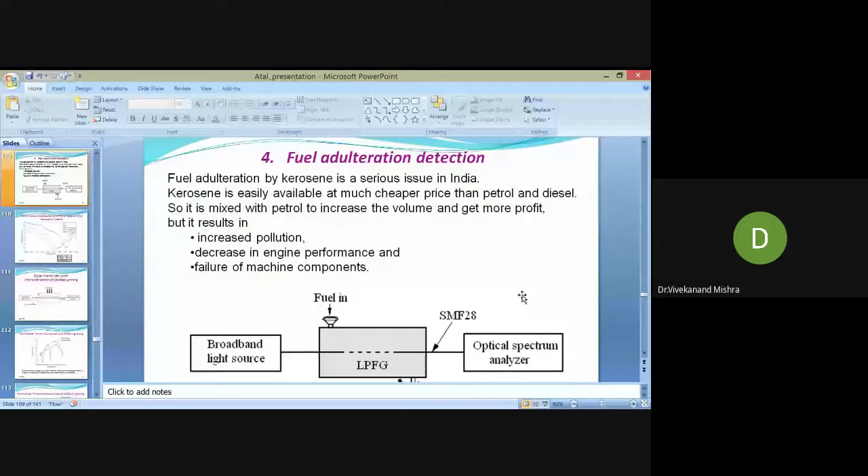We can detect this very easily just by using long period grating. Can easily detect just by long period grating. You can see this is the systematic experiment.

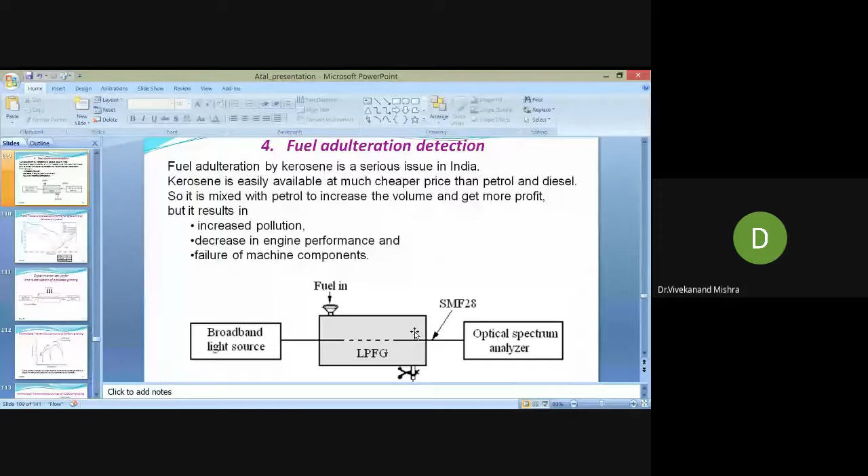Broadband light source, fuel will be introduced, and combined - or we can say LPFG means what? Light signal coming from here goes into the cladding region, and that cladding mode is going to interact with fuel components. Once they combine and interact together, the sensitivity we can get from the optical spectrum analyzer.

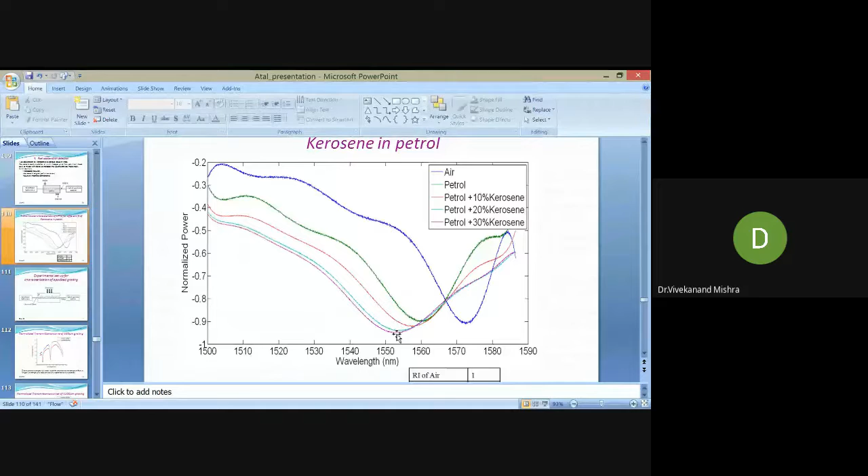...around 30%, you're going to see the peak, it's going to be around 1550 nanometer. So more mixture of kerosene in petrol, more it shifts towards that wavelength, and normalized power is going to be reduced. So for 30%, 20%, 10%, you can see the figure, and this is one of the ways to detect fuel adulteration.

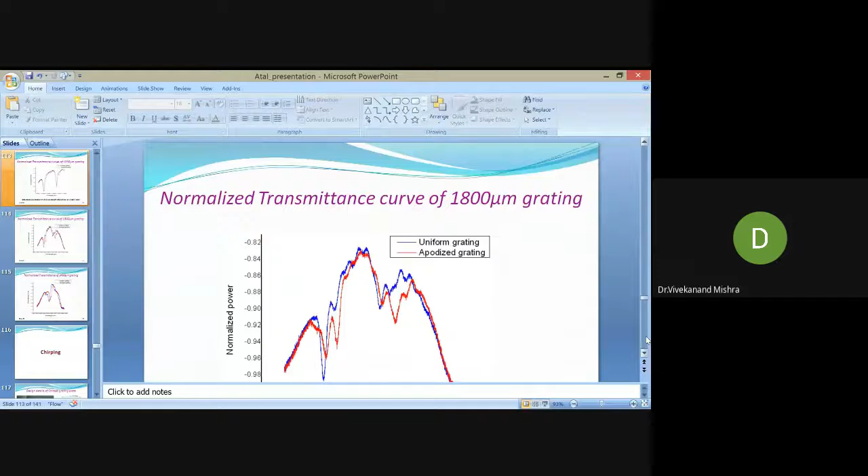Okay, so these are for another 1800 micrometer. This is for another shape.

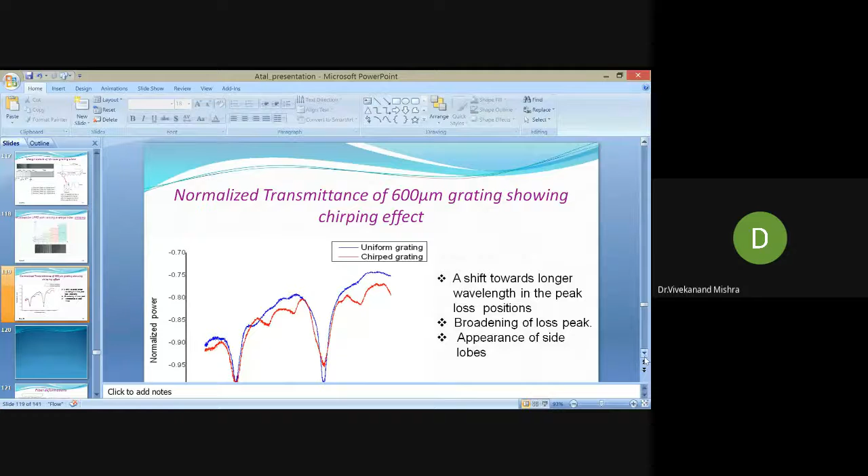See, this is the transmittance for the chirp effect for 600 micrometer. For uniform grating you can see blue color, and for chirp grating you can see red color, showing how the shifting happens towards the longer wavelength. Okay, so these are...

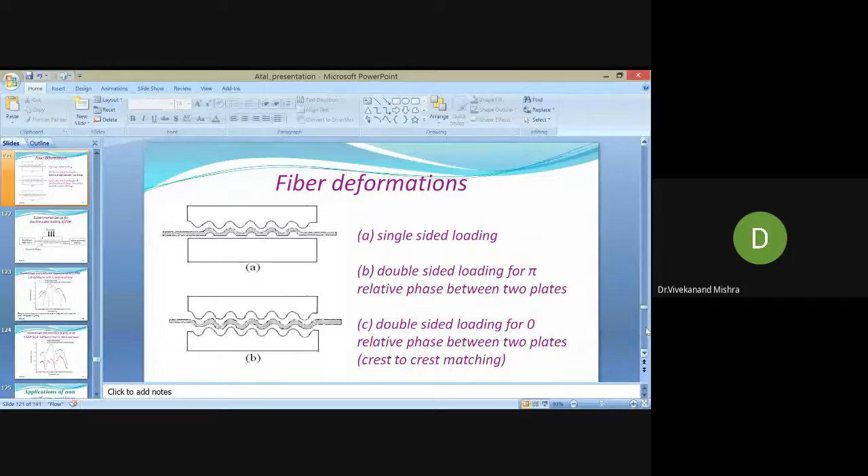Okay, so these are the different ways to fabricate the grating, just by fiber deformation, single side loaded, double side loaded. Different ways to make different types of grating just by applying the experimental setup: for the double side loading, apply pressure to the fiber, then apply the broadband light source, and see the optical spectrum analyzer. So these are the different methods to fabricate the long period grating.